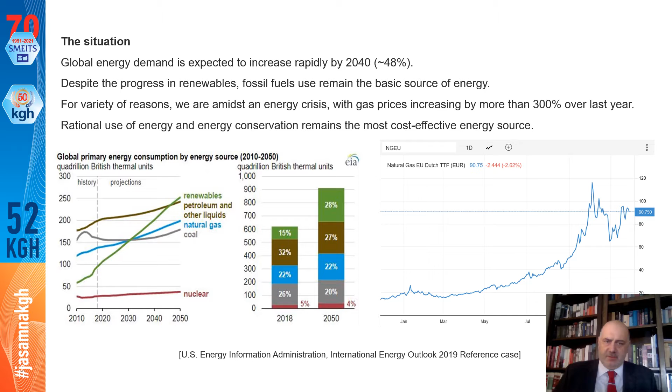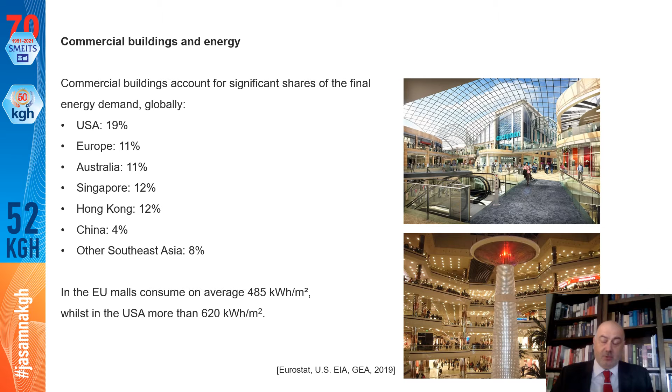In this line of approach, rational use of energy and energy conservation do remain the most cost-effective energy sources that we still have available. Now, commercial buildings account for a quite significant share of the final energy demand all over the world. From 4% in Asia to almost 20% in the States, commercial buildings consume vast amounts of energy. According to researchers in the European Union, malls consume on average close to 500 kilowatt hours per square meter a year, whilst in the United States this is more than 600. So they are heavy energy eaters, and we do have to take care of those if we want to reduce energy expenses and obviously also our carbon footprint on the environment.

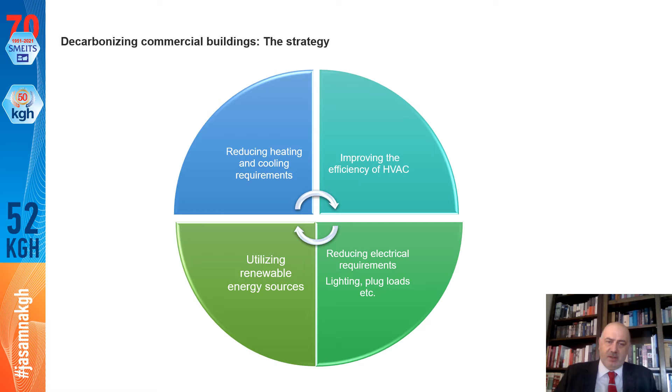If we want to approach the decarbonization of commercial buildings, the strategy that we have is pretty much straightforward. We have to reduce the heating and cooling requirements of the buildings. We have to improve the efficiency of the heating, ventilation and air conditioning. We also have to reduce electrical requirements, which are quite high in those buildings, lighting, plug loads, equipment and so on and so forth. And finally, then we can utilize renewable energy sources. I believe that everyone will agree that it makes little sense to start, for example, with the renewable energy sources if we have not reduced the requirements or if we have not improved our efficiency before.

Now, due to the progress in the technology and in the research and in the manufacturing, we have a bundle of tools available to achieve this goal. It starts with advanced materials like state-of-the-art insulation materials, super insulating materials, cool materials, smart glazings. We have excellent HVAC systems, which are in the epicenter of the KGH conference, from high-efficiency boilers to high-efficiency chillers, heat pumps, cogeneration. Then, of course, one of the most important fields of development over the last years are automation and controls, sensoring, adaptive controls, predictive controls, everything that can help us have a more flexible and even a more smart operation of the buildings.

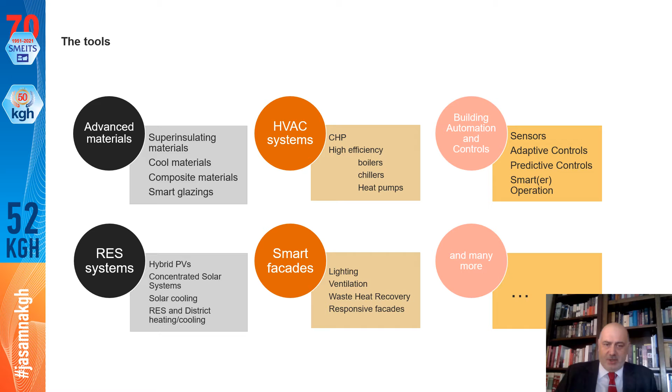Similarly, one cannot fail to notice the advance in renewables. One only has to think of state-of-the-art photovoltaics or of concentrating solar systems for power generation, or even of ground source heat pumps that enable us to cover significant parts of the heating and cooling loads. We have also integrated components like smart facades that enable a very nice degree of natural lighting, at the same time having sun protection, and that respond to the changes in weather conditions and the operational requirements, and so on and so forth.

So the question is, if we have all the tools and if we know the strategy, why don't we proceed faster with the energy renovation and the low carbon refurbishment of the buildings? And one of the obstacles we have to face is that we need to adapt the refurbishment strategies to the operational patterns of the buildings, because commercial buildings have a high utilization factor. They are very valuable assets. So we have to differentiate, let's say, 5 levels of refurbishment.

Starting from the very plain traditional maintenance, where one can carry out maintenance and slight upgrades of the HVAC systems without having an impact on the operation of the building and on the tenants, and that can last a few days, to the very other end of the measures, which include deep renovation strategies where you strip back the building to the basic structure, remove all the facade elements, replace the HVAC systems, which is of course something where you have to have the building for 1 to 2 years out of use.

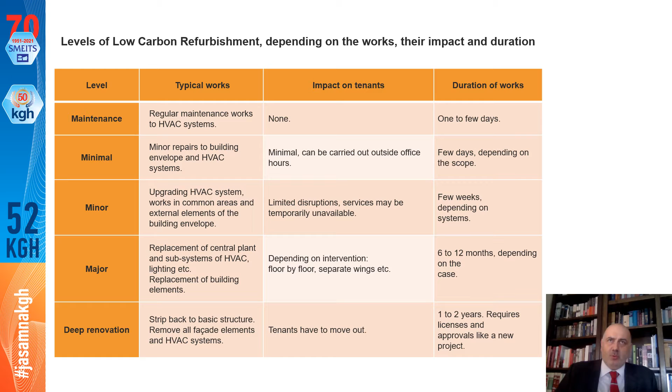You require a lot of licenses, approvals for a new project, and so on and so forth. And in between you have anything from minimal to major refurbishment interventions that can affect the building's operation for some days to a few months. So we have to consider what the goal of our refurbishment is and for how long we can have a building being under repair, under refurbishment, so that the investors have a clear picture of what lies ahead.

Now, if we come back to the technological aspects, it is quite interesting to notice, for example, that over the last 10 or 20 years, thermal insulation has experienced a silent but very important progression. So we have thermal insulation materials that nowadays have excellent thermal conductivity values, very low lambda values. In the case of the super insulation materials, they are an order of magnitude smaller than traditional insulation materials are.

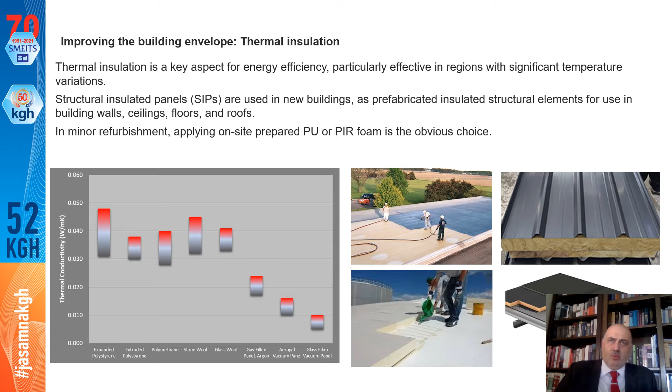But what is also more important is that we have, for example, structural insulated panels as prefabricated tools that can be used to replace building elements at a very high pace and with very high efficiency. Or of course that we can also, for smaller interventions, apply polyisocyanurate foams in situ, covering architecturally difficult shapes and without exposing the building to any important interruption of its operations.

Perhaps one of the most important fields where advance has been made over the last 10 or 15 years are cool materials. And particularly if we think of the Mediterranean region, or perhaps of the Middle East or Northern Africa region, the necessity to reduce peak surface temperatures during summer is very important, because this can lead to temperature drops of, let's say, 3 to 4 to 5 or even 7 degrees Celsius beneath the roof, and this has a severe impact on the air conditioning loads. And those are tools or materials that can be applied very easily without interrupting the building's operation.

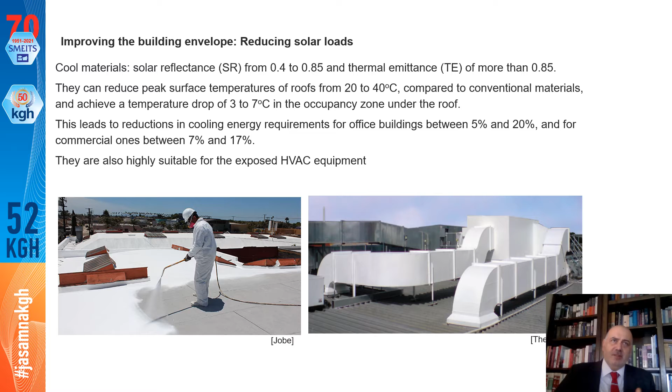Something which is also important to notice is that cool materials in forms of paints or emulsions are very interesting also when it comes to covering exposed HVAC equipment like ducts, so that you don't lose energy which you have very costly produced a few minutes ago.

Commercial buildings, at least some of them, have also very extended glazed areas. And we have established for the last 20 years now the use of low emissivity glazings that are very nice in order to reduce thermal loads either from within or from without. But we have moved a few steps ahead. So we have now photochromic glazings which adapt passively to the variation of the solar radiation during the day, so that you can reduce the heat being transmitted and hence the cooling loads as a correlation to the solar radiation.

And of course we have moved ahead to, let's say, electrochromic glazings, where you can actively steer the transmissivity of the glazing so that you control the interior, both considering the lighting quality and also of course the cooling loads in a much more advanced and sophisticated way.

Cost factors are still interesting. I mean, low-E glazings are competitive to conventional glazing. Photochromic glazings are still slightly more expensive. Electrochromic glazings are still to come, and they are very expensive, and there are some matters of functionality, but it is certainly one of the key steps for the coming years that will help us in reducing cooling loads.

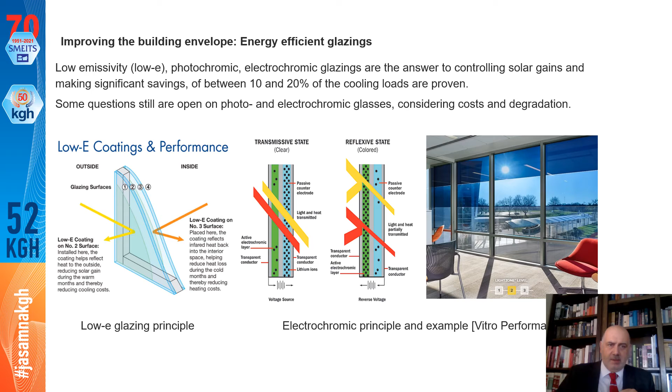One tool that is quite interesting, because it does not only affect the building but the whole urban environment, are green roofs. And this has been highlighted since the 90s and the first major heat waves recorded in urban areas, that being able to mitigate the urban heat island effect locally, or even if you plan a major action on the city level, on neighborhood level, is quite interesting. Green roofs are a very nice architectural tool to establish also some spaces of living and of having a useful break, and even for educational purposes.

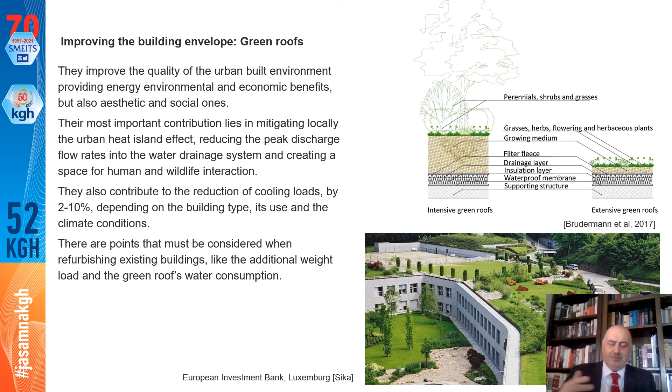They can contribute to the reduction of cooling loads, let's say, by anything between 2 and 10%, depending on the building type, on its use, and on the climate condition. On the other hand, one should keep in mind that when refurbishing existing buildings, you add some weight, and this has to be investigated before. And of course, you have also a water balance, which in areas like the Eastern Mediterranean is always a critical matter, because it is not really a very purposeful exercise to reduce energy consumption but to have a high demand of water, which can be scarce and precious over the summertime in many parts of the world.

Now, if we come back to think of the way in which commercial buildings are traditionally cooled and heated and hot water is provided, we have to adopt an approach that really tries to integrate the various technologies existing. We have wonderful heat pumps today with coefficients of performance that would be a dream 20 years ago. We have also excellent renewable energy systems for on-site power generation, from PVs to CHP, even to micro wind generators.

What is crucial and what has to be part of such a strategy is that this has all to be integrated. So we have to make strategic choices. Let's say if we go for an all-electric approach, we need PVs, or we need micro wind, or we need even CHP to drive the heat pumps, which can provide for cooling and heating, eventually for hot water. Or if we want to go towards a more thermal approach, then we would have to use some high efficiency CHP, or perhaps some use of biomass fired systems if it is allowed by environmental regulations. Or even we can use the traditional established well-known and reliable solar thermal systems.

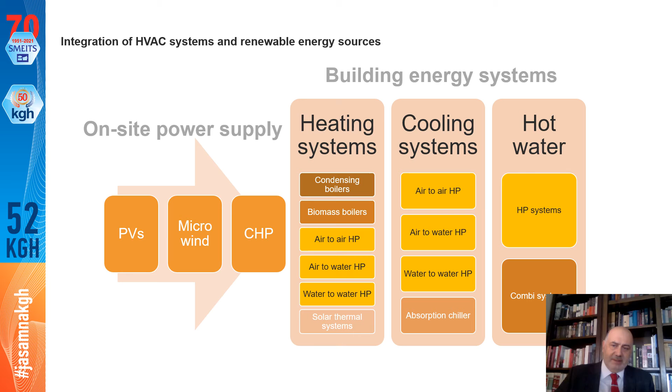Let me give an example that's already 15 years old. It's an office building that was refurbished. It's in Athens, in Greece, and it houses a company that produces solar systems, by coincidence, where we tried, together with other laboratories and the company housed there, to come up with a nearly zero energy building in the heart of a city, in a building that is very conventional, hence with no architectural extravaganzas.

And so we came up with combining solar thermal systems, flat plate collectors, Fresnel collectors, geothermal energy by means of a ground source heat exchanger, and using absorption cooling to meet the biggest part of the air conditioning loads of the building. Furthermore, there were some photovoltaics, which can be seen on the left side of the building. It is vertical, it's not exactly southern oriented, but it's still there.

And what is more interesting is that the building also features thermal storage options in terms of concrete tanks in the ground, so that you can store excess heat produced mostly by the solar systems to use it outside the hours when you have the solar radiation available, or you can even use it in the winter to reload the ground so that you don't face problems with depletion of the ground energy after 5 or 10 years of operation.

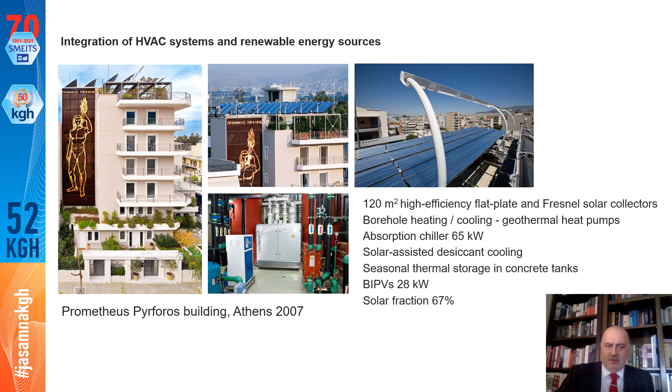We have been monitoring this building ever since it was constructed, and overall it achieved a solar fraction of close to 70%, which is not bad for a building not on purpose designed to be a zero energy building. And most important, it has been proven to be a very reliable set of systems working well together. Now, this is not enough anymore. Making a building that is efficient, that is even resilient in terms of energy supply, is not enough if we don't integrate it with the energy infrastructure.

And the more the renewables progress in the network, the more it becomes important to integrate the building into the grid. So we have to be able to shave loads, the peaks of the loads. We have to be able to transpose loads during off-peak hours, and we even have to be able to allow a bidirectional communication, i.e. feeding the grid with energy produced in the building or receiving energy from the grid, supporting electric vehicles, and all these nice things that lie ahead in the future.

So the buildings have to be integrated in an active way, in a proactive way, in the energy grid. Smart sensoring, smart metering, all this can be utilized to make buildings that are really part of a big integrated energy system. And at least in my opinion, this is one of the true prerequisites if we want to decarbonize our cities in the coming years.

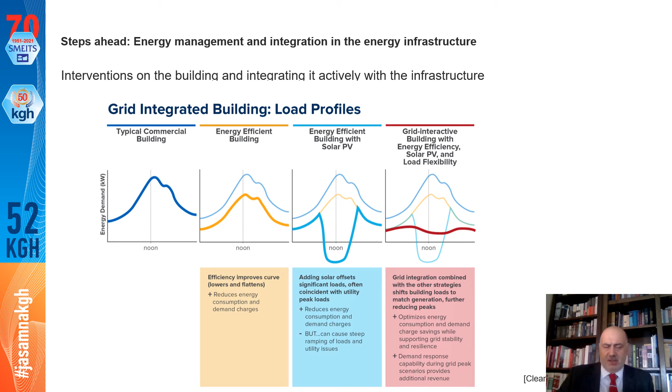Now, I believe that we agree that there is indeed a necessity for an integral strategy for the refurbishment. And we will not be able to achieve zero energy goals or nearly zero energy goals without some high-end strategies, i.e. smart buildings, energy storage, concentrated power generation, or similarly.

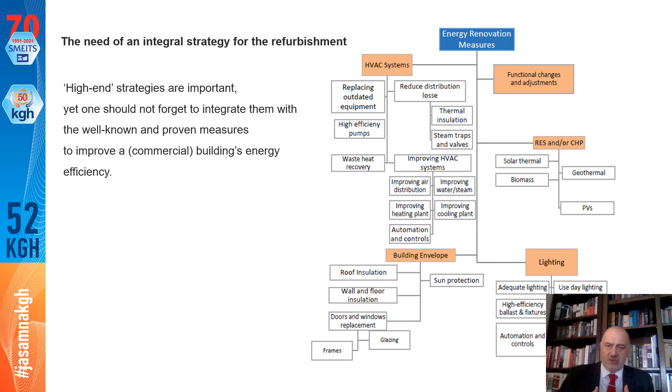But we have to keep in mind, we should not forget that these high-end strategies and these advanced technologies have to be integrated with well-known and proven measures to improve the buildings', in that case the commercial buildings', energy efficiency. And in that sense, we must always keep in mind that we have the HVAC systems, we have the building envelope, we have the lighting, of course, and we have all this working together smoothly, neatly, without temporal or spatial contradictions, in order to be able to fully utilize the renewables.

One more thing, it doesn't really make sense to try to make a low energy and low carbon building if we cannot measure the impact of decarbonization, because we have to be able to convince, A, the building owner and the stakeholders, and B, obviously the regulatory authority, the state, that the carbon footprint has been reduced.

For this purpose, we can use the tools of carbon footprint analysis, we can use life cycle analysis, or of course we can use the well-known environmental rating systems like BREEAM, LEED, and so on and so forth. But this is in order to demonstrate that what we plan and what we implement is really successful, and to be able to monitor this after the refurbishment has taken place.

One point that has to be underlined is that we have to choose the appropriate indicators, which in the case of commercial buildings may, for example, be kilograms of carbon dioxide equivalent emitted per square meter, but they could also be kilograms of carbon dioxide equivalent with respect to the customers served, or, if it is a hotel, to the overnight stays of people, because this is the only way in which we can carry out a benchmarking exercise that is not only formally correct, but also substantial and convincing.

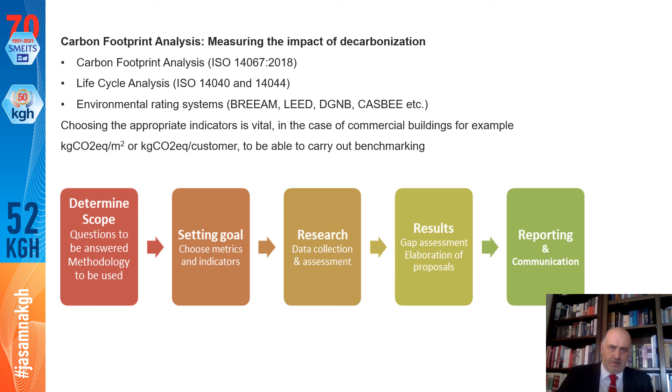In this line of approach, and in order to sum up my conclusions, I would like to highlight a few points. Decarbonization of commercial buildings is a huge challenge, but it is at the same time a great opportunity. Commercial buildings are complex, they have varying requirements, and they often have contradictory priorities on behalf of the developers. High levels of lighting are not really compatible with high energy efficiency, for example.

Owners and managers don't always agree on the goals. Managers, by definition, tend to reduce operational costs. Owners would like a maximization of the assets' value. And so this has to be treated in a correspondingly complex way. On the other hand, they present a challenge because they are significant, capital-intensive investments. Precisely for these reasons they are evaluated by different criteria by the stakeholders.

And of course, they are also landmarks in our cities, and so they can present the best examples we can have in order to promote energy efficiency and decarbonization. I think we can all agree, and we are all experts in these fields, that the expertise and the technology to achieve low carbon refurbishment is there. It is available. We have it.